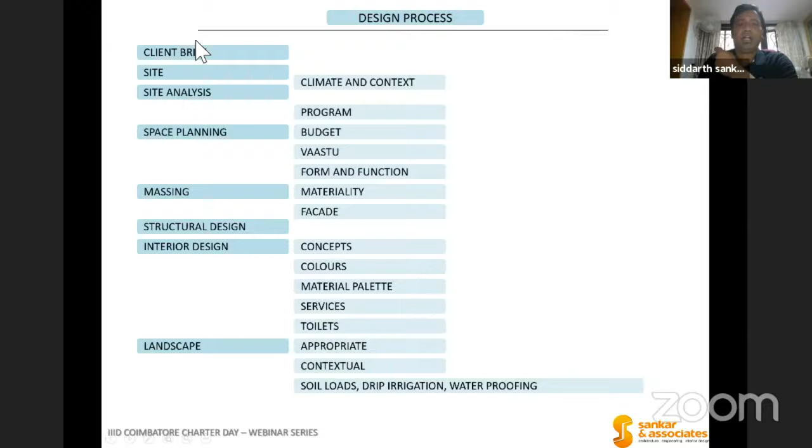Let me divide this into a pragmatic division of how the process of house design goes. First, and probably the most paramount thing, is the client brief - besides the requirement, their aspirations, their family style, the family size, who's going to come and live with them. Are they a joint family? Are they a nuclear family? It varies from city to city, region to region, country to country, person to person. So this is something one has to pay strong heed to.

Site, climate, and context - probably the most important thing. For any building typology, I think I'm preaching to the choir here, but site analysis: understand your site perfectly, it will always give you clues. This is a mantra we've gone about for the last 50 years in our firm, and we've achieved moderate success doing that. Space planning.

Budget is something that drives space planning. Today, Vastu, whether you like it or not, whether you believe in it or not, the Vastu guy or Vastu becomes a very important part of the house. More often than not, I encourage the client to just get the ideas from the Vastu guy and come to us, and don't bring the Vastu guy to meet us. That's one thing out of your head.

Form and function, which is what the architect derives. Materiality, the architectural style, what you're thinking about, and what you want to bring to the plate as a building - because the architect's dreams are also a part of the house. So it's very important to get that out too.

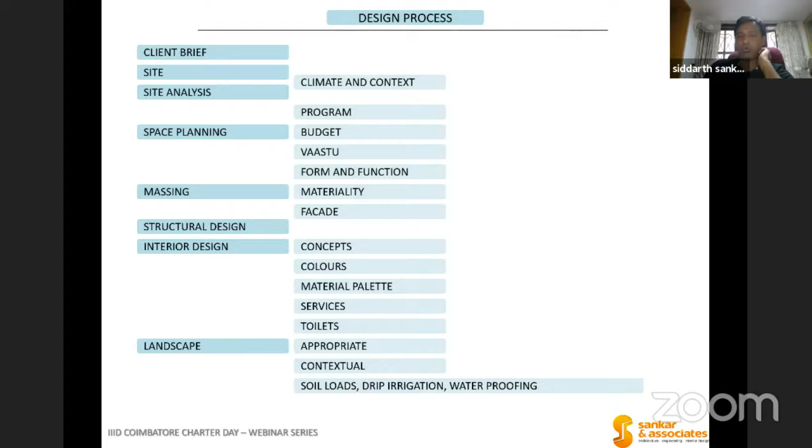So it is very important for you to understand appropriate landscaping. Things like soil loads, if you have roof gardens, pools and all that, you have to take into consideration. And drip irrigation, waterproofing, all those things are very important. These are basic building blocks.

Now what I'm going to do is talk you through three very different kinds of houses. One is a very tight urban house, the second is a retreat home, and the third is a house with a place of business or activity. Let me walk you through all three. How much time do I have? You have 10 minutes more. Okay, let me rush through them.

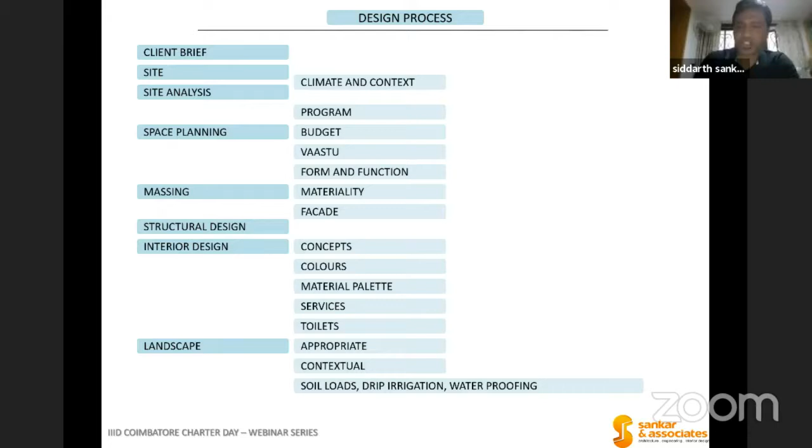And the client wanted about 5,000 square feet of space, so we had to do a block. The client had very strict Vastu guidelines and things like that which we had to follow. So we had to absolutely do the block.

There were two very important things. One was to satisfy all his requirements—he wanted 4 fully furnished en-suite bedrooms, besides other things. The second thing is, how do you make this block interesting, how do you make it look good? Most clients come to you and say, sir, I want the house to be cheap and best.

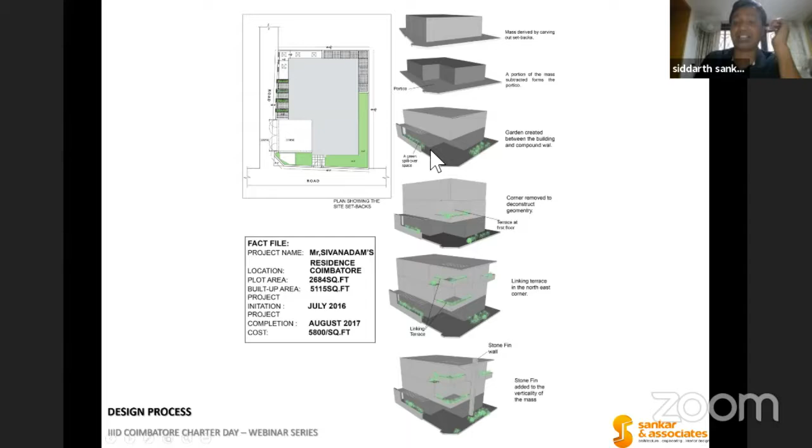Only in India does cheap and best work. Cheap cannot be best, best cannot be cheap. You need to work through all these things. So the first thing we started looking at was the site, and we said this northeast corner was the most interesting thing, let's start doing something with that. And that's where we started.

It's a simple plan. One enters through—luckily we have a corner road, so we have an entry, car drop off and everything. What we've done is create a lift. It's a 3-storied house. We've done all the public spaces on the ground floor—drawing, family, dining, kitchen—and taken all the bedrooms from the first floor onwards.

One of the things, a recurring concept in most of our projects, is that there are 2 ways you can always design a house. Landscape or a little bit of garden or nature in the house is extremely important to us, because they bring in most light and natural vegetation. That's very important to us. So you can design a house 2 ways: one is a house with a garden, a big garden in the front; or you can do a house in a garden, where you deconstruct and bring small garden spaces throughout the house, bringing garden to where the occupants are. To me, that seems a much better urban model.

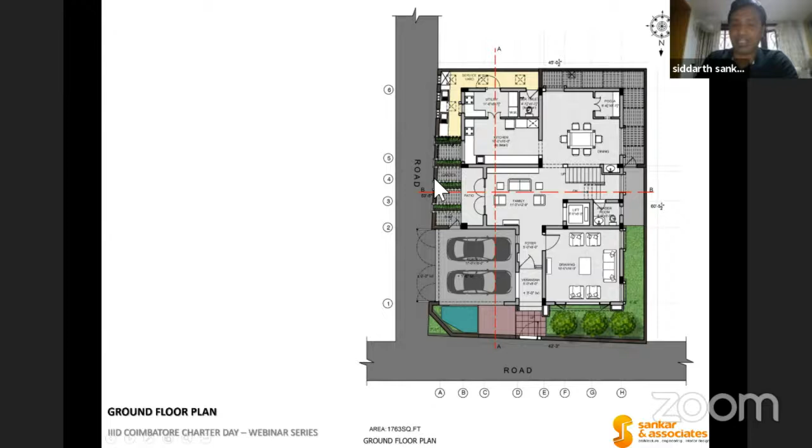So we started carving out these little garden spaces on every level. On the ground floor there's a garden level, on the first floor there's a garden, and on the first floor there's actually a lounge and 2 bedrooms. On the second floor there's again a garden. So every room overlooks something of value, and that's very important to us in every concept we do.

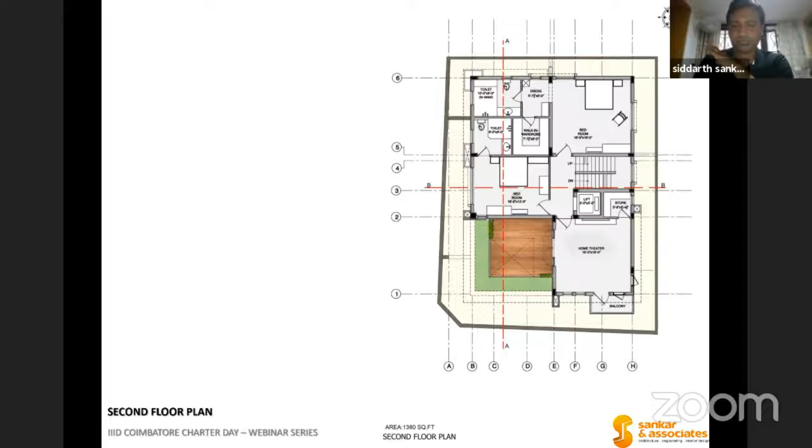So like I said, we started burrowing out the corners and making a very interesting corner of the house. We tied a pergola around it to satisfy the Vastu constraints and make it a rectangular, regular form.

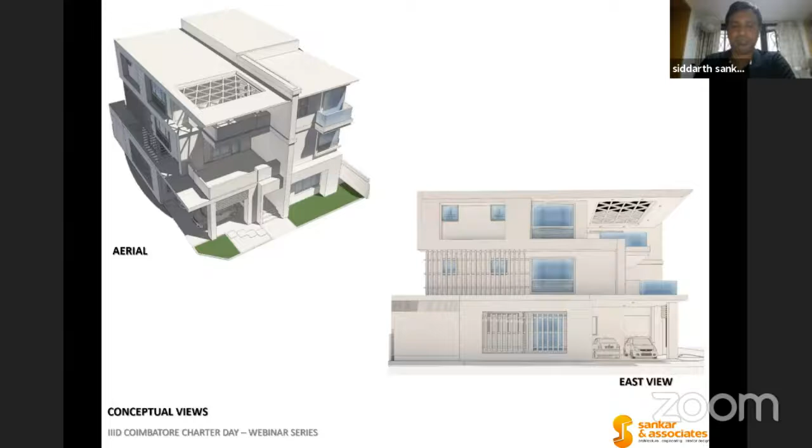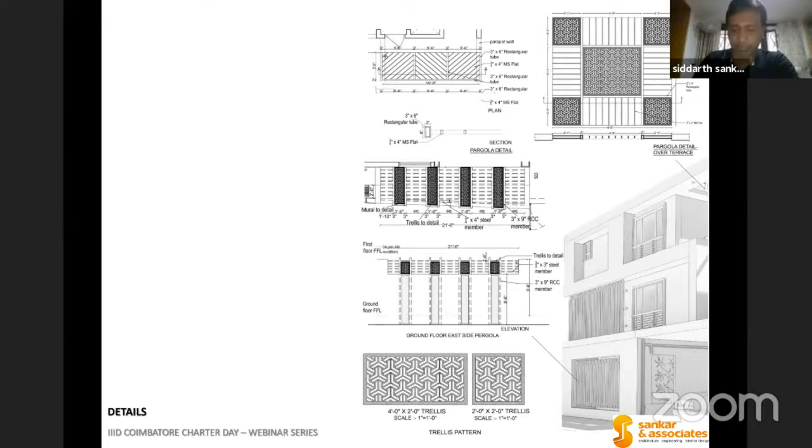Let me go to the photographs. So it's a 3-storied house, like I said. Another thing we did, and I'll show it better in the photograph, is that most urban houses have to deal with safety grills. We started eliminating these grills by introducing pergolas, which tied onto the compound walls and created gardens within them, thereby eliminating grills on all the windows. I'll show you more pictures—you'll get more clarity. That was the first 3D model we generated.

The materiality completely changed as we went along with the project. That's another thing with building, especially with housing typology—it's a project, a product that's always in flux, and you have to be ready to embrace the change.

Like I said, this is the 3-leveled house. This is the side garden. We've got 2-leveled gardens, one above the other, and one overlooks the other. And we've got a lot of overlook spaces in the house.

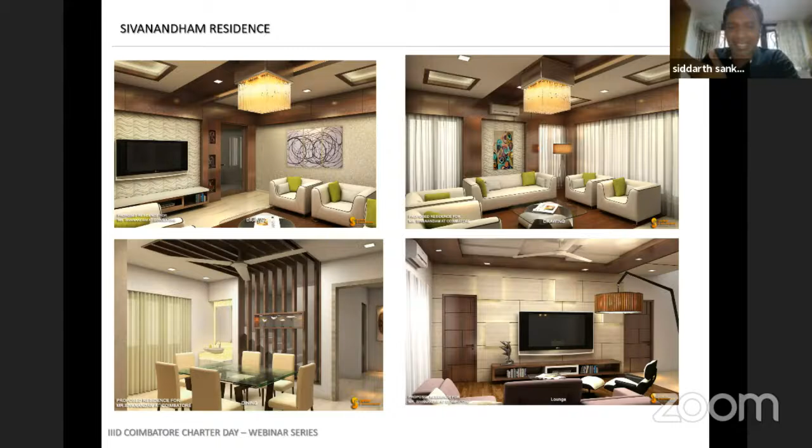We did interior renderings. The client wanted wood and beige color, he wanted a very soft look to the whole thing, and that's kind of what we went with. And why not, it came out pretty well too. So that is what the house looks like.

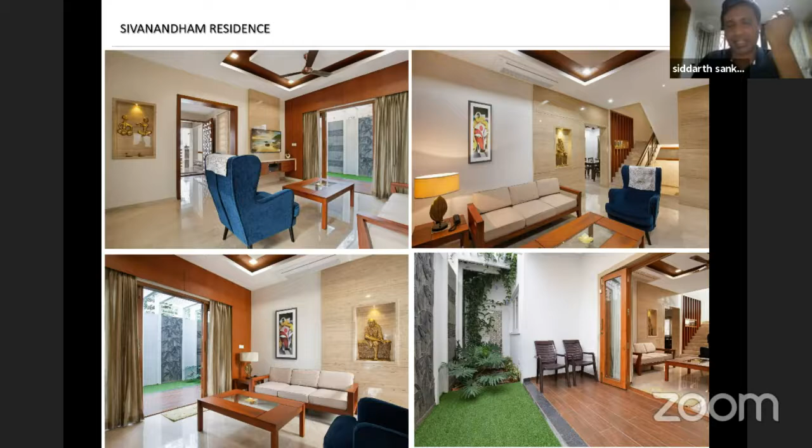This is the shot of the living room, and this is the side garden. You get out of the family room into the side garden, and you can see the pergolas on top that span the building to the compound wall. Thereby, we've eliminated all the grills in this area, so when you open it out it's a completely open space, and they even leave it open at night. Because of the pergolas there's a tunnel effect that gets invoked, and the whole house is filled with natural ventilation.

This is the detail I'm talking about - these are the pergolas on top. This is the boundary wall, where we've done some nice stone work. And this is a space where the family hangs out all the time.

Let me go to the next thing, which is a retreat home. Here we had a large site, but it was a challenging site because it was heavily sloped. It also helped that it was a house for a friend, so we could experiment on a few things in the house.

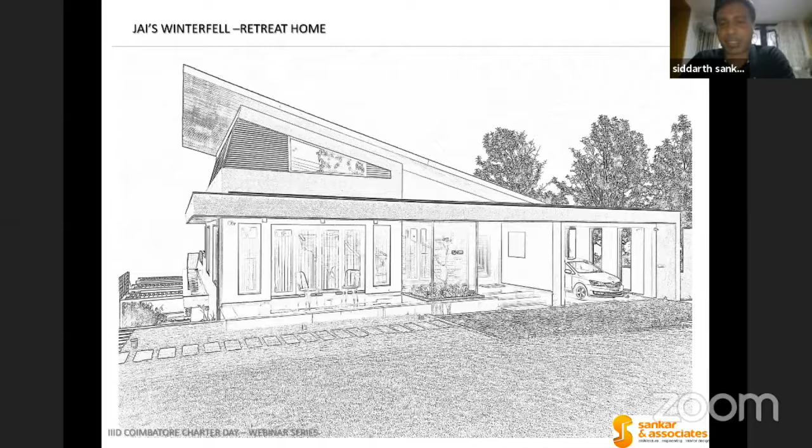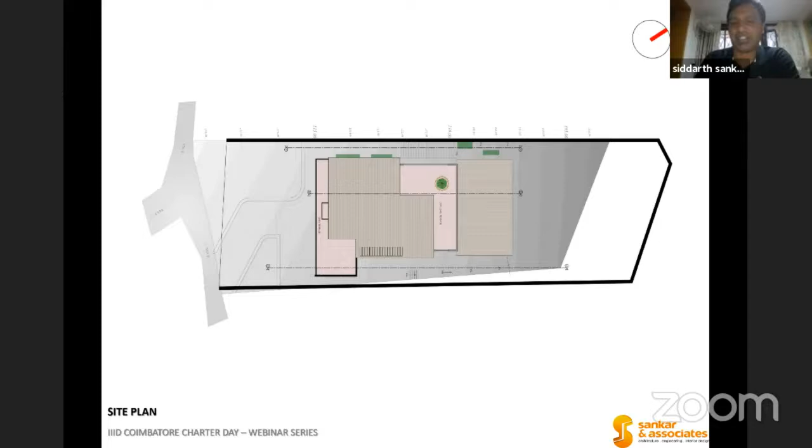So what we did was we started working on the house in 3 levels. The first level was, you came down from the road into the house level. We pushed the house back by about 25 to 30 feet.

And we created a car park, and we brought in all the public and common areas, and every level had a deck. I'll show you a view of the valley. It's drop dead gorgeous. The living, dining, the kitchen, and all that is in level 1, and there is this pink space which is the deck, and you can see the other levels below.

Level 2 has the bedrooms. Unfortunately, because of Vastu, the master bedroom is in the southwest corner, and that's the only bedroom that doesn't have a deck. So sometimes Vastu comes and kicks you in the back, and you can't do anything about it. But the other bedrooms have gorgeous views looking outside, and there is also a private deck in between.

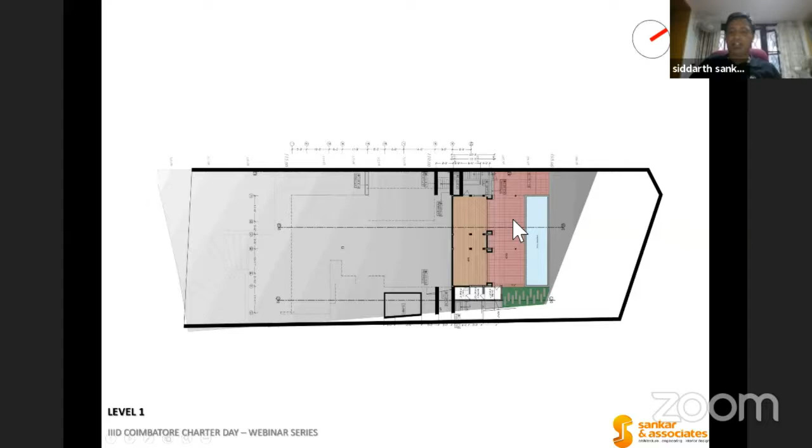And the third level is sort of the entertainment level. We wanted the third level to be the entertainment level because they wanted access from outside. So we've done a bar and a heated pool in the cool climate of Coonoor. We've done a heated pool, and I'll show you pictures of it.

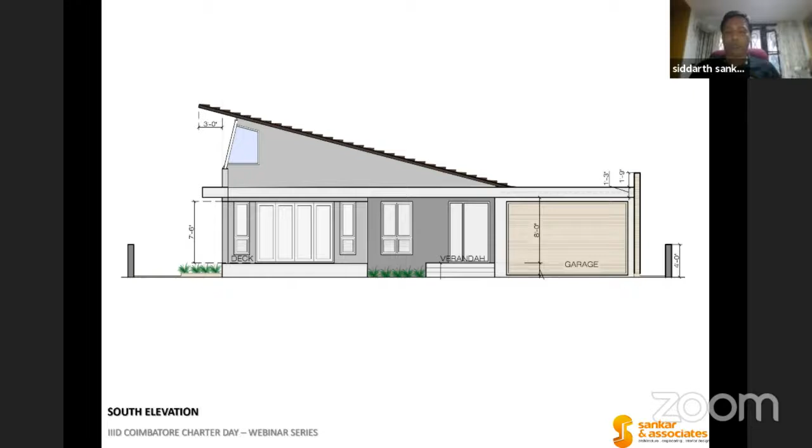It's a very, very unpretentious looking house in the front. This is all you see from the front, but the house unravels itself as you go down the slope. You can see the level difference of the house. This is about 14 meters all the way down, so 40 feet down.

You can see the house, it's almost 3 to 4 levels. There's 3 levels of the house, and there's an upper level of garden and a lower level of garden.

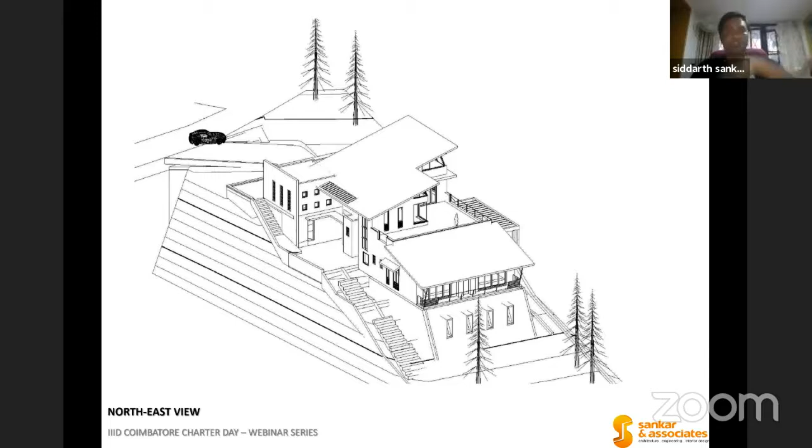That is the initial Revit modeling of the house. We use quite a bit of Revit modeling to help us work through difficult forms and difficult contours. You can see the steepness of the slope in this.

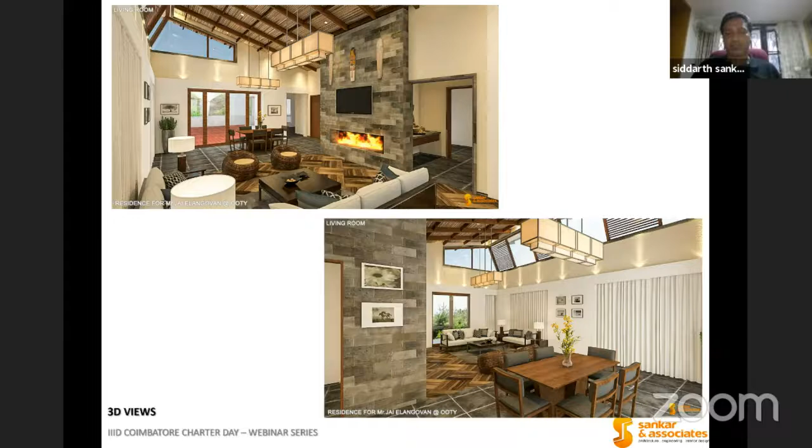Another thing that we wanted to see was the sky here is absolutely pristine, because there is absolutely no lights around for quite a bit, at least for about a kilometer there are no lights. So at night you can actually sit in your living room and see the sky, or in the daytime you can see it's clear, it's full of stars, and you can see the moon on a full moon day is absolutely gorgeous.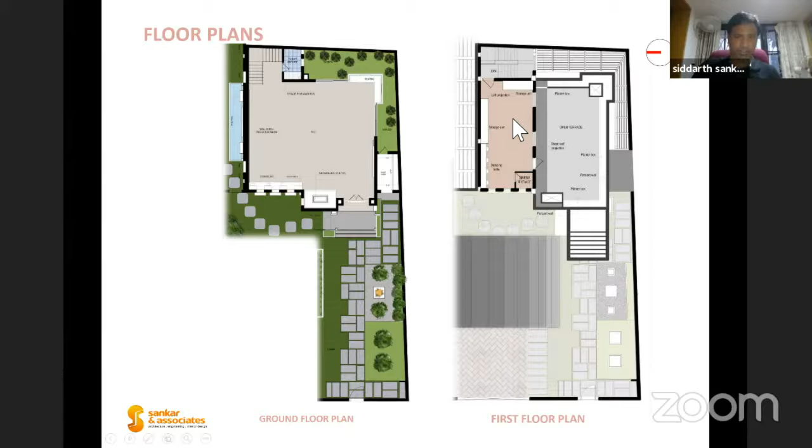One of the things we did here was bring in Nataraja, the guy who watches over the whole dance, and he had to be kept in a particular way. Another thing we did was open it out into a garden, so during daytime breaks people can sit out for a bit, and it also fills the studio with natural ventilation. On the first floor of the dance floor, we've done a small dress change room, and production is done there.

One thing we've done with the Nataraja statue is given it a skylight, and at exactly 12 o'clock on the summer solstice, it's filled with a ray of light, inspired by Tadao Ando, but we wanted the shaft of light falling on Nataraja.

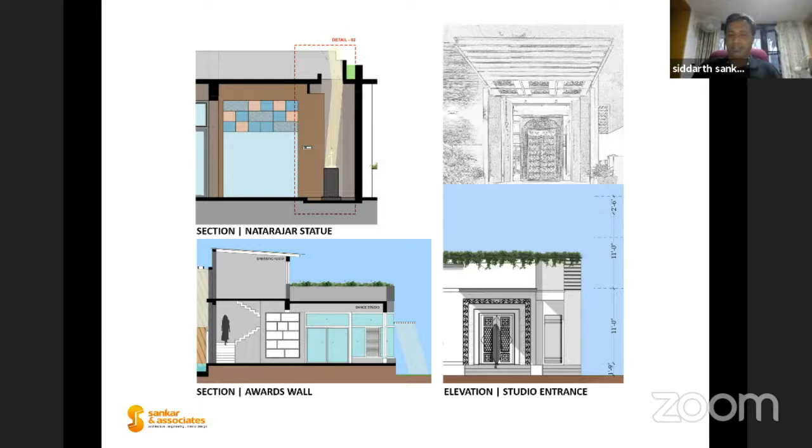One of the things we wanted to do was blend traditional elements with very modern construction. So that's how we enter - there's a Deepa Stambham which welcomes everybody in. This is about a 150-year-old door that we got, and we had it painted by a mural artist. We also had a very stiff budget to work with, so all these tiles are actually sample tiles from a tile showroom, which we used for the ceiling.

That's the shot of the Deepa Stambham. And that's the sample tiles we used on the ceiling - it brought a little element of color to the whole thing.

This is the interior space. This is the Nataraja where the shaft of light comes from the top, and we got this mural painted by a group called Bhavanam - the largest mural he's painted, about 12 feet by 40 feet, completely hand painted in the studio.

We've got a small research corner where she puts all her books and does all her laptop work, and this is also the audio segment - all the audio instruments, recording instruments are there. It can be pulled out at any time and they can work.

Another thing is the flooring is specialized, because there are two things: one, we didn't want the knees of the dancers to be affected. Second and more important, dancers, especially in formation, communicate by tapping their feet, so we didn't want a very silent floor - they would tap, and the dancers behind would listen and follow course. That's how patterns in dance work - it was a very important learning for us.

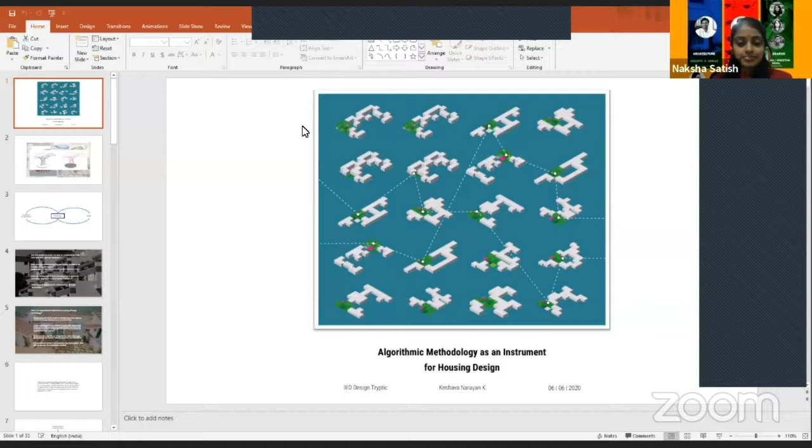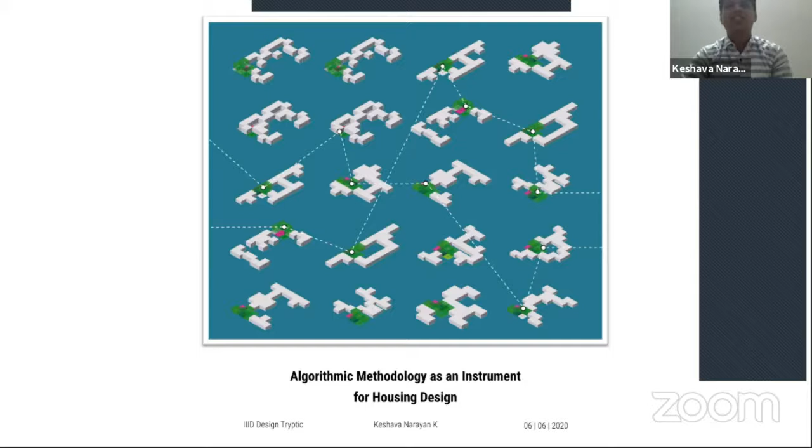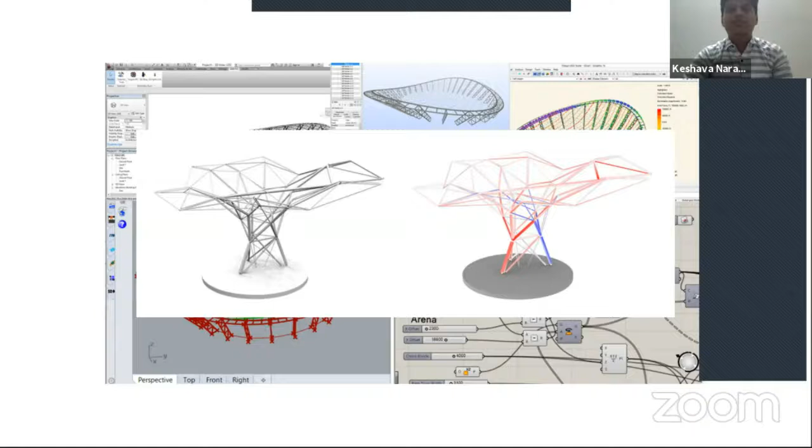Tonight I'm looking at a house through the lens of technology. If we talk about technology generally in architecture, it relates to producing funky forms. The computer as a design tool usually comes later in the design process, once the design is done. I was obsessed with this idea that technology should play an active role in the design process and not just as form optimizers. So I was obsessed with this question: how can technology inform the traditional design methods, and in turn inform the design of a house?

So I asked a few questions at the start of my research. Can the design decisions we take as architects be more informed than just our instincts? How can we push technology's limits beyond visualizing our intuitive design strategies? How can the traditional be reinterpreted through technology?

So why is it important to understand housing through technology? As Siddharth sir said, house is the most complex thing an architect can design. It's also the most predominant form of construction in India that is almost neglected. Usually in large scale housing projects, the scope and scale is very large and requires numerous design decisions that go together with each other.

These considerations can be processed as information in a computational process. Computers are well equipped to process a large amount of information better than humans. It's also possible to unearth new patterns and relationships that cannot be seen in a traditional process, because the medium of analysis is just different.

As we see in architecture generally, all good designs have a recurring set of patterns in them. My intent through this research was to unearth these successful housing patterns in habitats in India through technology.

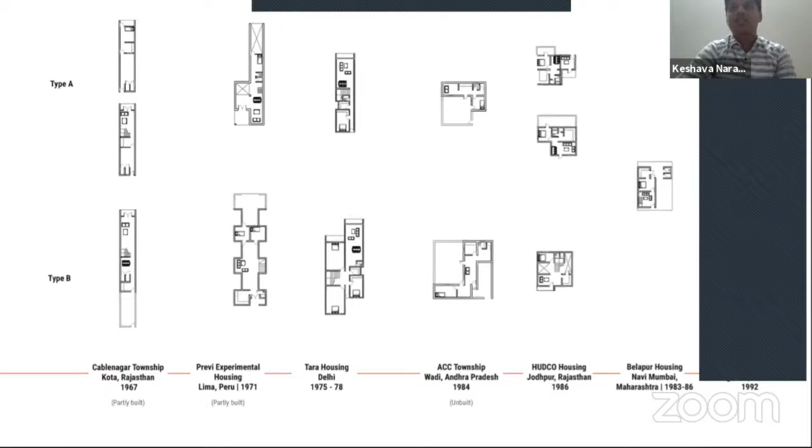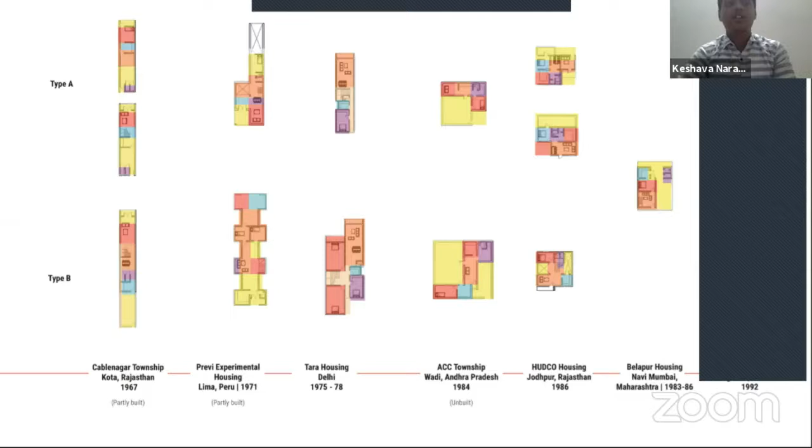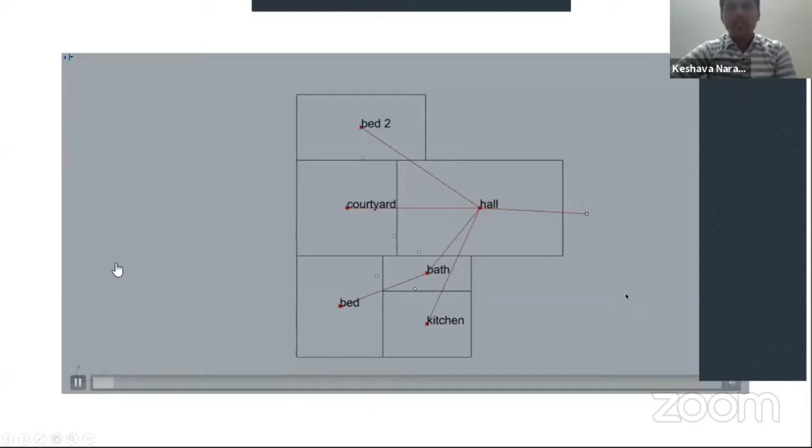First, I abstracted the functional spaces from the spaces in terms of functions in the units, and then fed them into the generative system. Here I'm running a short video of how the generative system analysis works—the spaces are abstracted in terms of squares and dot lines.

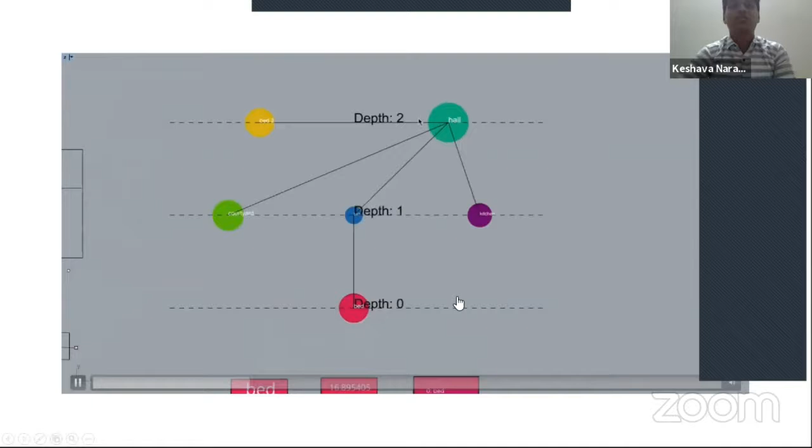Once I feed this into the generative system, it gives the percentage of area, and it also gives the depth map. The depth map refers to the number of doors one has to pass through in order to reach the space. This is how the generative system, done by me, analyzes the house plan.

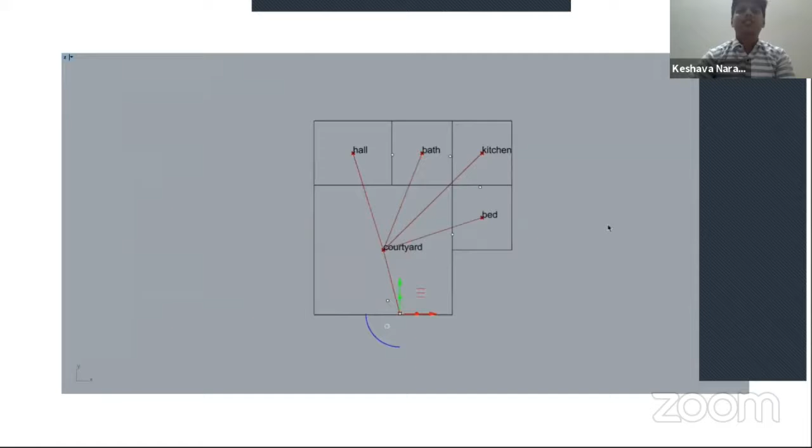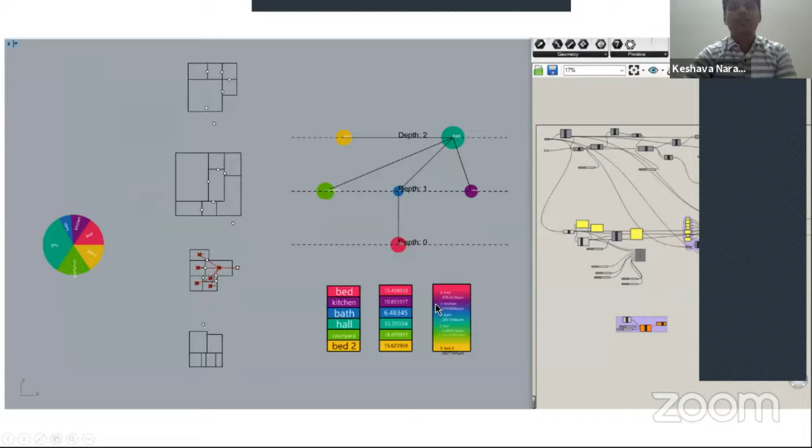This is a screenshot of the result generated from the code you can see on the right. It displays the percentage of area that each space occupies, the depth map, and the percentage. As a result of this, there are 6 criteria that I analyzed using the code. The first one is unit types.

Here I analyze the location of different spaces and the shape and proportion of each space with respect to each other. The second is the module, where I looked at the module as a whole with respect to the unit, then calculated the ratio of open to closed space in a unit, the interrelationship of functions with respect to the unit, and the overall generation pattern of how the units function with each other.

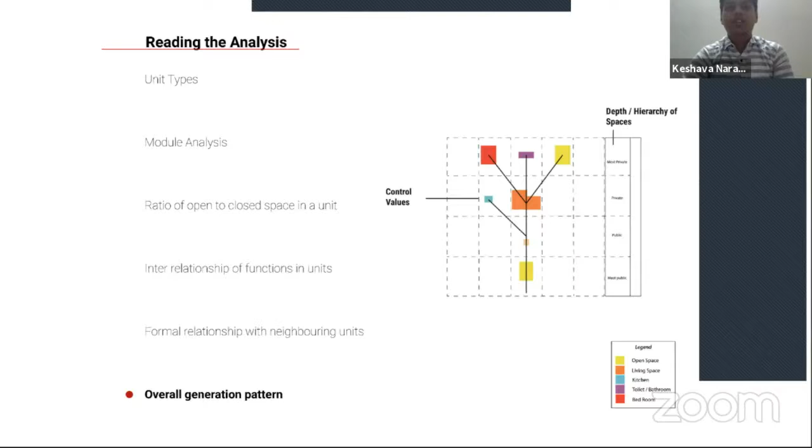This is the chart that I came up with after analyzing these units. The general observations that I had after doing these case studies—I have classified them into three types.

One is profile or geometry oriented. I observed that in Correa's housing projects, the unit size was generally 1:1 or 3:1, referring to the proportion of area occupied. The square is usually inspired from the Vastupurusha mandala, which is used in hot and humid climates like Mumbai, whereas he developed a module called the tube house, used in hot and dry climates. If the unit is a square, it follows a cluster generation.

If the unit is linear, it follows a chain-like generation. In Correa's works, you can see the importance of the courtyard that is generally there in his projects, very evidently seen. The ratio of mass to void in his projects is generally 1:1 or 1.5:1.

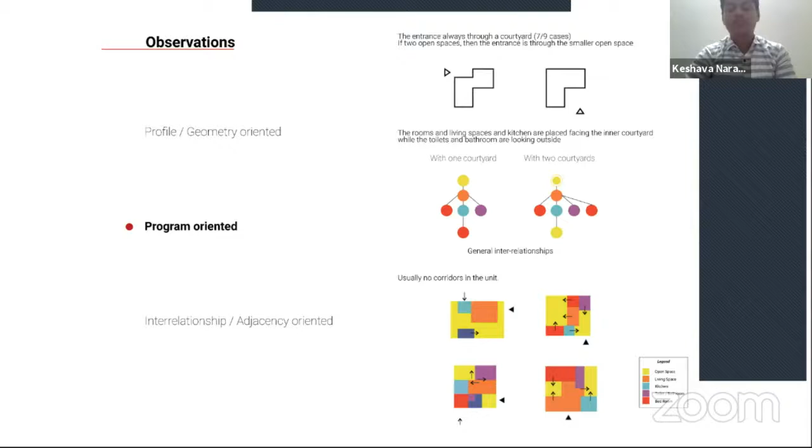For program-oriented units, the conclusion is that entrance is always through a courtyard or open space. If there are two open spaces, entrance is usually through the smaller one. Generally there is no corridor or circulation space in his units, because it increases the construction cost. The typical space allocation of each unit is as shown here.

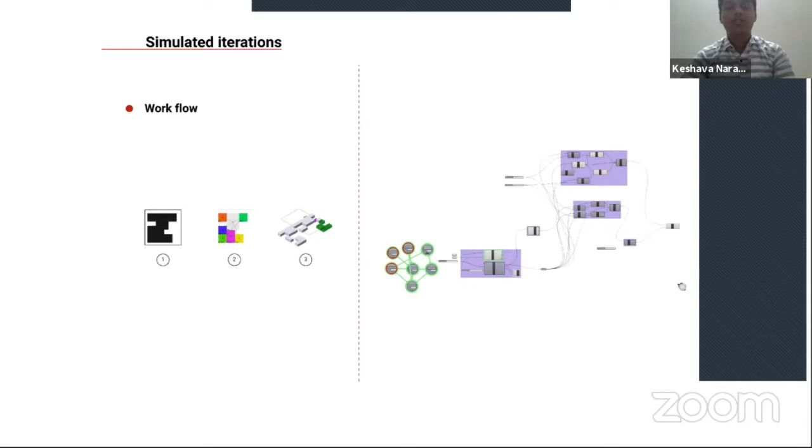After doing this analysis, I created a workflow of how this generative system should work. First, the generative system allocates the space for the unit to occupy, and then it multiplies.

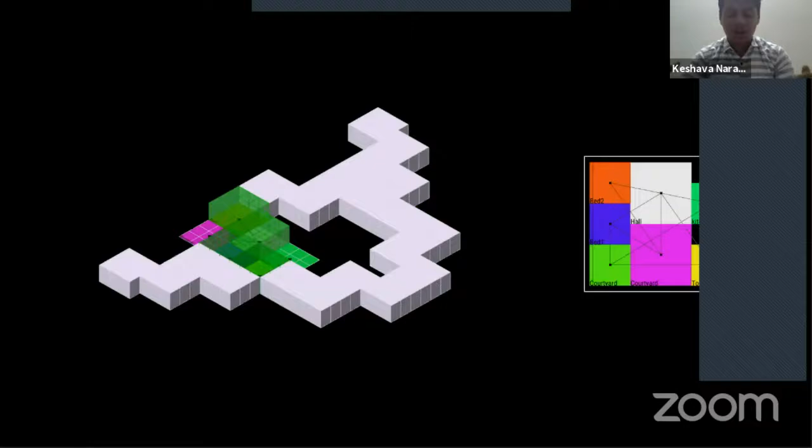This is some of the iterations that was generated as a result of the Grasshopper code. I'm playing them. These were the kind of outputs that I got as a result of this analysis.

These were the kind of unit plans that were generated as a result of this analysis by Grasshopper, and these are some of the iterations.

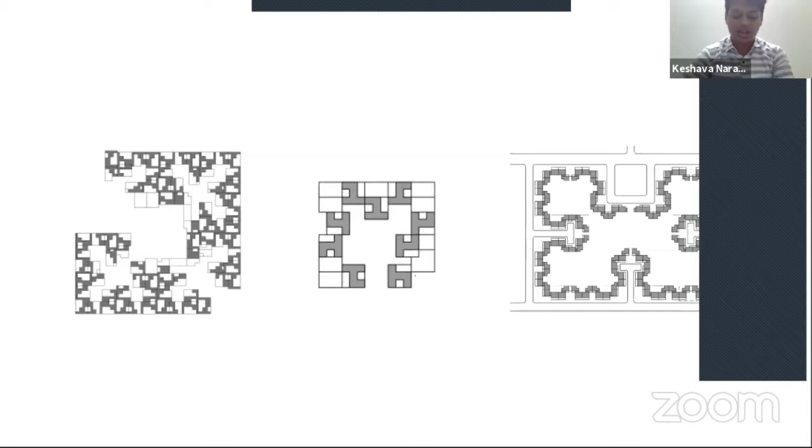This is one of the results that I had obtained, and here you can see that it has considered the open space and has designed the unit accordingly. The scale of the open space generated in between is similar in scale to the image shown on the right.

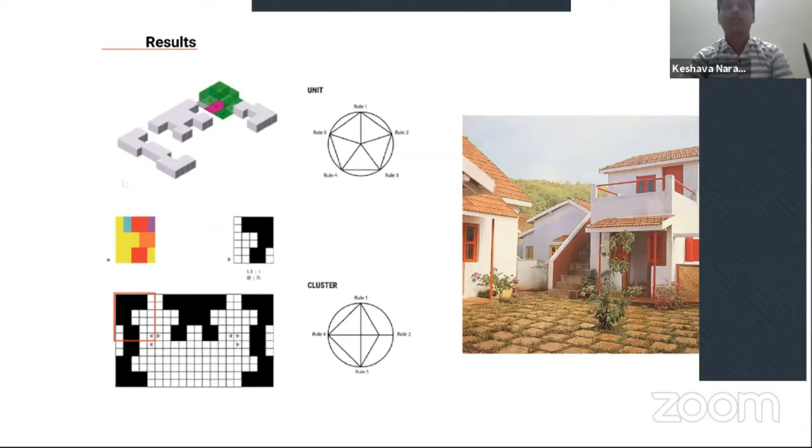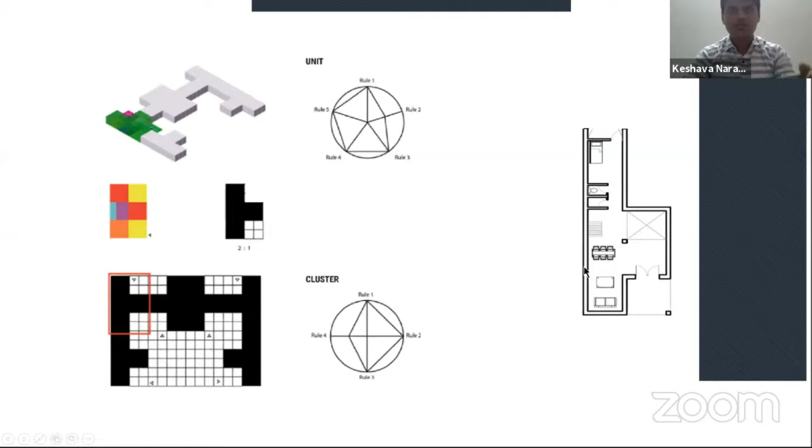This was a strange coincidence that happened: the Grasshopper system generated a unit exactly similar to one designed by Correa in one of his housing projects. This was one of the observations, and like this, I had collected many observations as a result of this analysis.

Here I have compiled the units that have been largely similar to what Correa has designed. For example, this one shown in a rectangle is similar to the Previ housing, and this one is similar to ACC housing, one of the projects shown earlier.

The conclusion is that the design process does not just end with choosing one of the generated designs. The trade-offs generated earlier have to be analyzed, and design decisions considered alongside them. Understanding traditional designs alongside technology can be a way for technology to start tapping into the intangible aspects of the design process, which is often what technology is criticized for missing.

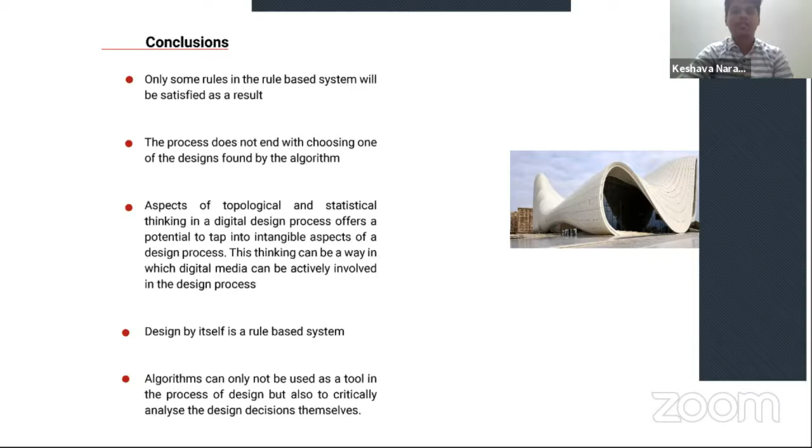Hence, algorithms cannot be used only as a process of design, but should also be used to critically analyze the design decisions themselves, not just stand as form optimizers as they do in the world today.

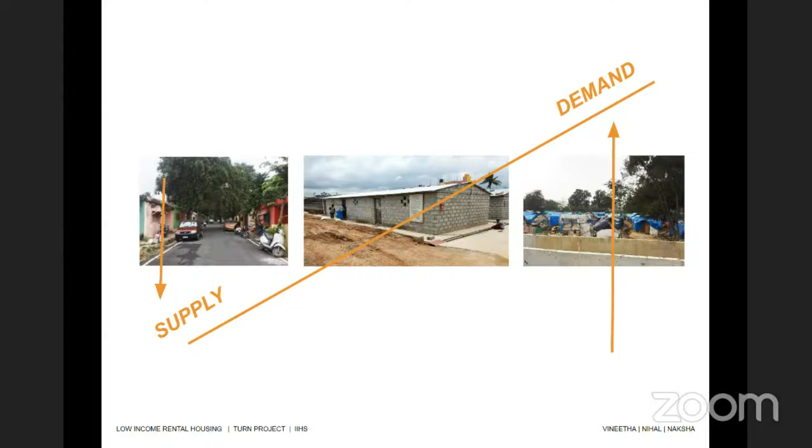So we have this skewed demand and supply ratio, and not only are we not building houses for this section that needs it the most, we are also not building them fast enough, essentially.

So now we know that we need multiple tenure housing because not everybody can afford to own a house, and because people are more mobile, you need different sorts of housing options. We need to rethink the way that we provide houses to people.

So our question was then to understand what forms already exist and how can we facilitate and strengthen them. We say strengthen and not provide rental housing, because our research shows that due to the complexity and largely informal nature of rental housing, it is almost impossible for the state to provide adequate rental housing. It can, however, facilitate through policy and subsidies.

But for that, there is a need to research and understand who are the people who are actually producing these kinds of rental housing, what is driving the form of rental housing, is it adequate, are the living conditions good enough, and how do we strengthen these informal, homegrown practices of providing houses and scale it up in a way that it actually bridges the affordable housing gap.

So I'll now pass on to my colleagues who are going to talk about this. Yeah, so essentially we've...

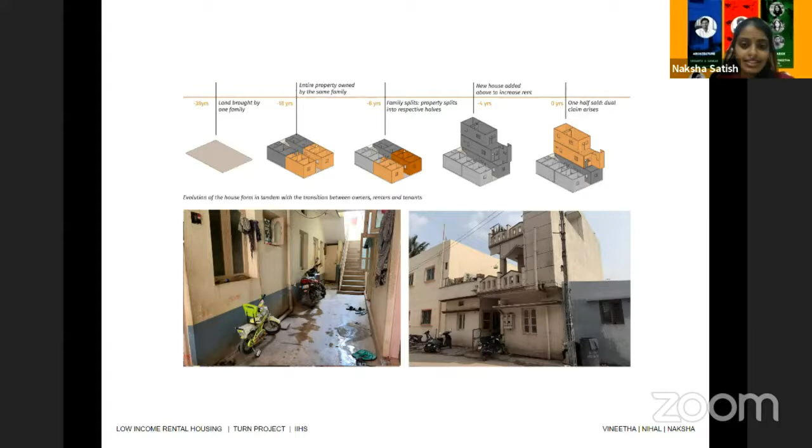The second feature of rental housing is the idea that it is highly born out of economic and social considerations of the homeowners producing and creating this supply. This story is from a house in Yashwantpur, which is a growing post-industrial zone very close to the transportation hub.

Mrs. Sarojamma owned this house initially. As she went through financial transformation, her considerations led to the bricolage nature of this house. You can see how impromptu it is, with staircases randomly added. We were trying to understand what was the reason behind this and the sequence in which it was born. Through chit funds, she managed to build one floor with her neighbors.

Then she took a bank loan and added another floor, becoming an owner of 8 houses. But very soon, due to mismanagement of finances, she became poor and couldn't pay back the loan. So a temporary owner emerged, and she sub-rented the property to someone else. Those 4 properties were then further sub-rented by the new emerging owner.

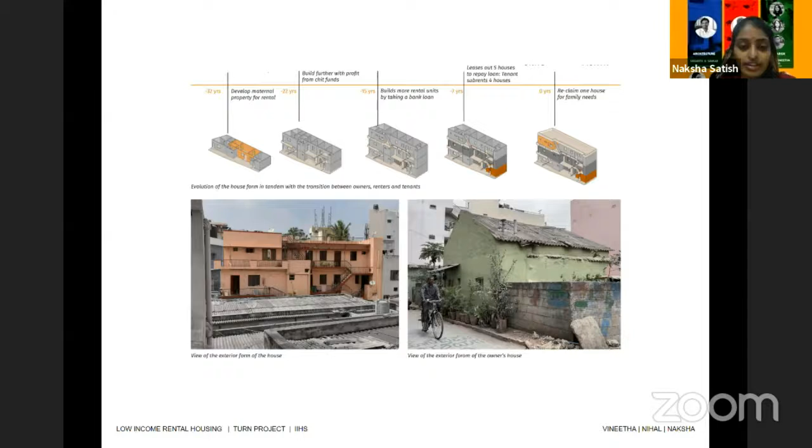I'll quickly run through the next major finding from both cities. One other feature we came across was that in both cities, as Naksha had said before, there was an absence of a formal designer. In most cases, the rental units emerged on the basis of situational constraints and the local knowledge and trends of the neighborhood.

If you look at this particular case, the homeowner was a migrant to Coimbatore who had migrated in the early 90s, and he was working in one of the manufacturing units that made jigs and fixtures. Over the decades, he saved enough to procure this particular piece of land, and then he himself designed this building.

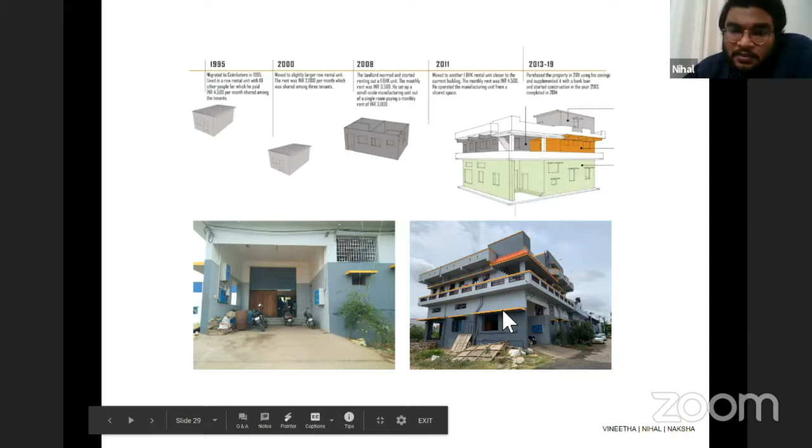So if you look closely, the ground floor of the building is a manufacturing unit that houses a small scale industry that makes small parts for larger industries. The first floor houses his house where his family stays. Then there are 2 rental units on the side here, and the top floor again has a worker quarter.

So these rental units came up as an impromptu decision. Like what Mr. Siddharth was saying earlier, a house is largely driven by the logic of an individual. In the same case here, the reason why this person chose to build rental units was that this particular area was located on the outskirts of the city, and the neighborhood had largely similar small-scale manufacturing industries.

When he chose to bring his family over and make a house here, he realized that they don't have any sort of feeling of presence of neighbors around. So once the building was nearing completion, he added these 2 rental units so that they would have a sense of security offered by the tenants.

Similarly, the decision to add a workers' quarters was taken because that also in a way ensured a surety of labor to work in his manufacturing units. Since it was designed by himself, when we were interviewing him, he was saying he's aware that he had made a couple of design flaws, and in retrospect, if he had known these things before, he could have substantially saved a lot of costs.

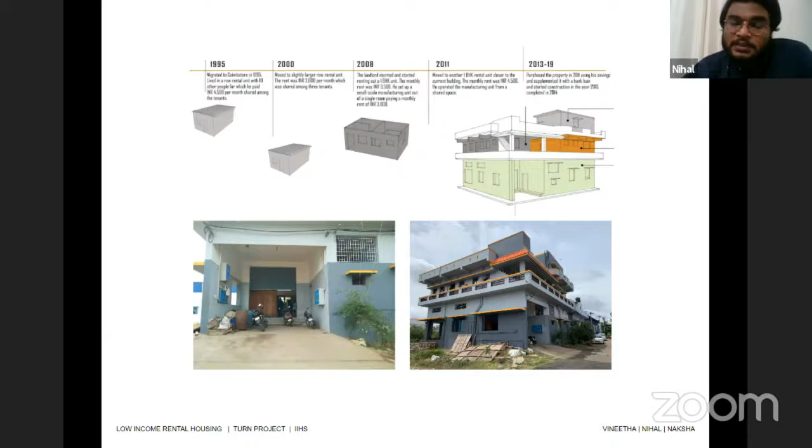A similar case that we saw in the outskirts of Coimbatore, Naksha, next slide, is located near the Chill SEZ in Coimbatore. Here again, this particular piece of these units stand on a large tract of agricultural land, which is located in close proximity to the SEZ.

The landlord was a former employee at the IT park, and realizing an immense business opportunity, he saw that there was an increasing demand for rental housing in and around that area, particularly by the support staff employed in the offices in the SEZ. So he invested in building these row units in a small portion of his agricultural land.

When we were interacting with this particular person, he was saying that when they built the first set of units, they didn't really have an intention to expand it. That's why they went for this particular sort of construction, also because this was the kind of construction you see all around Coimbatore and other parts of the city that usually caters to this particular tenant group. This is also the reason why they could not build on top of the first set of units, because it didn't have a proper concrete roof, and the foundation was not strong enough to accommodate a second floor. So these are the kind of decisions that the landlords make at a particular time.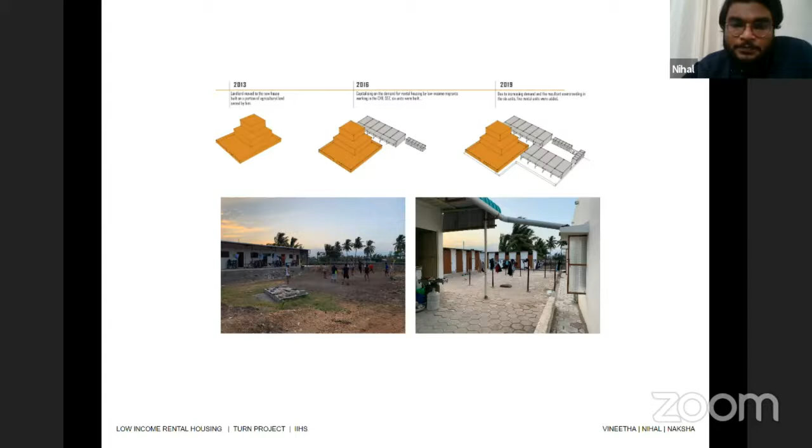One other major finding of our study is the owner-tenant relationship. What we see is that the form is an imprint of the social relationship between the tenant and the owner. It's often a codified manifestation of certain codes of conduct that they share between themselves. Across both cities, we observed a clear trend: the kind of relation the tenant had with the owner, and vice versa, often informed the design aspect of the house.

For instance, in this particular case, this was a unit built as a post-retirement plan for an elderly couple, located in close proximity to the CHIL SEZ. They built this in anticipation of the IT boom, and they thought their prospective tenants would be the IT professionals working in those companies.

But unfortunately for them, it failed to attract their targeted group, largely owing to lack of connectivity of that area and lack of amenities in and around it. Instead, the group it attracted were the support staff in these companies, largely security guards and housekeeping staff.

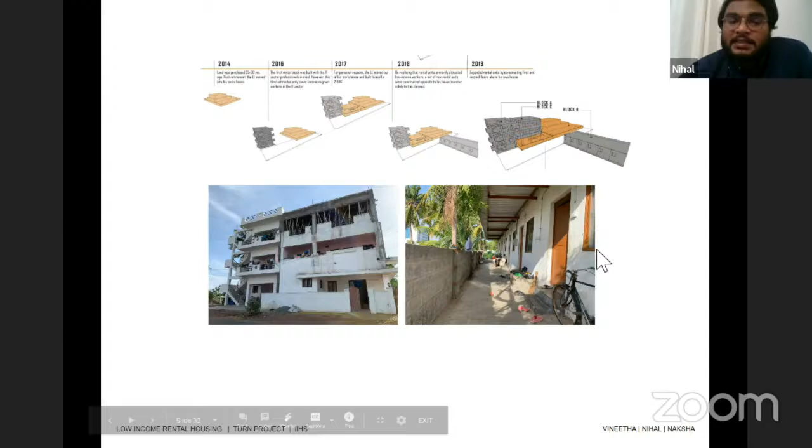Again, the houses went from a 2 BHK to what you typically see for worker housing, which is a large hall that may or may not have a partition in between—the kind of worker housing you see in Coimbatore in earlier cases and also in other cities of India.

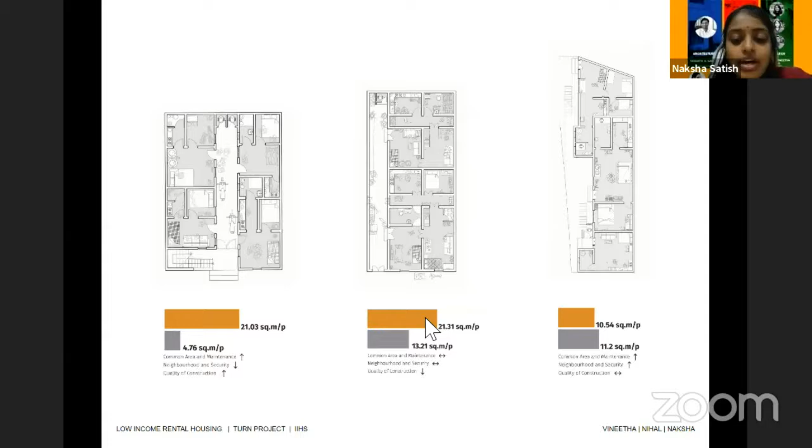When we examine the individual houses and the space occupied by the owner and tenant, we see a certain sort of negotiation happening. In a few cases, the owner occupies a substantially larger area than the tenant, but in other cases the tenant also dominates because of a relationship that grows over time.

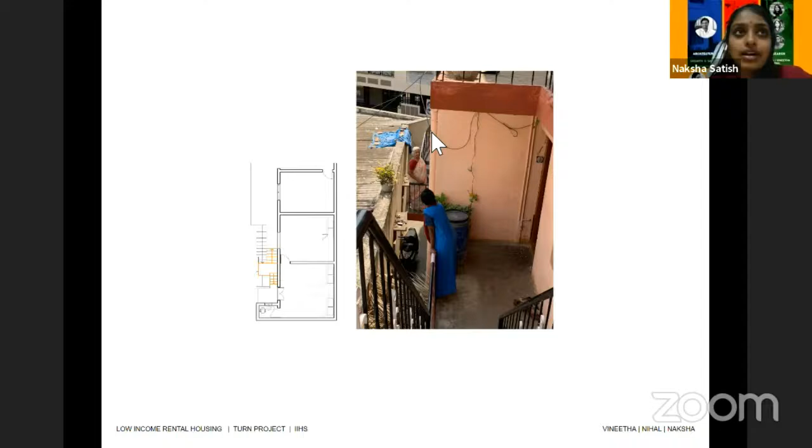We wanted to pull out certain instances of how the architecture of these houses facilitated or shaped new relationships between the tenants. Because this house was occupied mostly by bachelors, they were forced to add a parallel staircase, which led to a very different relationship and way of interaction between the neighbors.

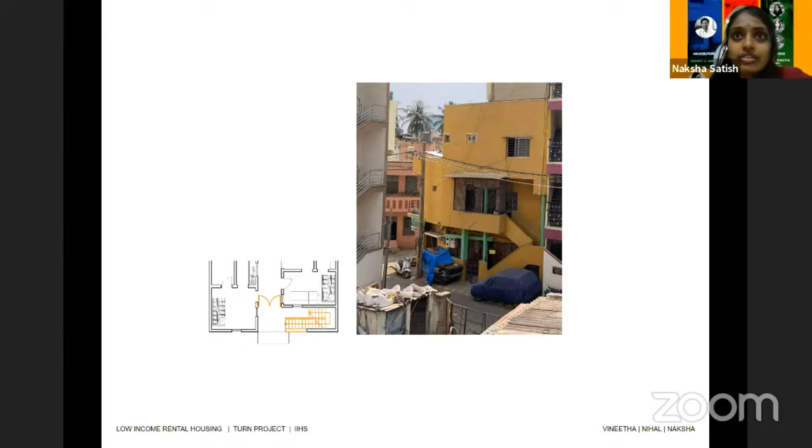When this house owner finally decided to add a house above, they constructed an external staircase and created a new door to prevent the new tenants from interfering, which hints at a certain sense of privacy and boundary that often gets lost when trying to produce large-scale affordable housing.

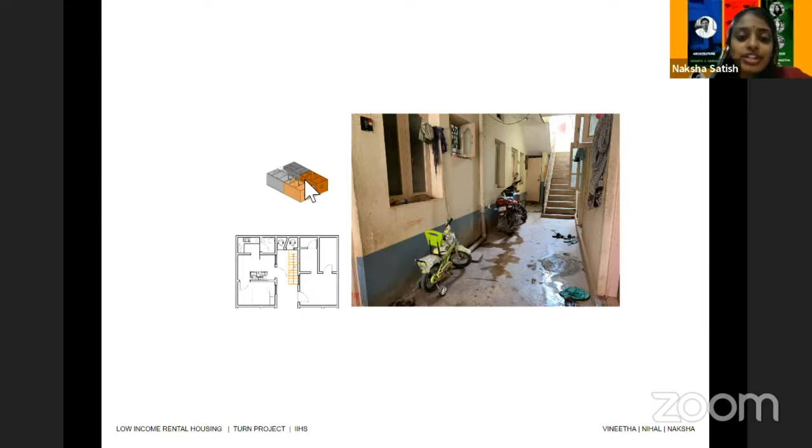On the other hand, in the first example we were talking about, despite the split in ownership of the place, because the house was built earlier, the one staircase continues to exist and negotiates with the emerging new users and people.

We wanted to share another set of findings, the stories of the form. The form itself is an imprint of the social relationships between tenants and owners—the arrangement of furniture inside codifies the aspirations of the tenants, and the rental housing outside actually affects the configuration of the house itself.

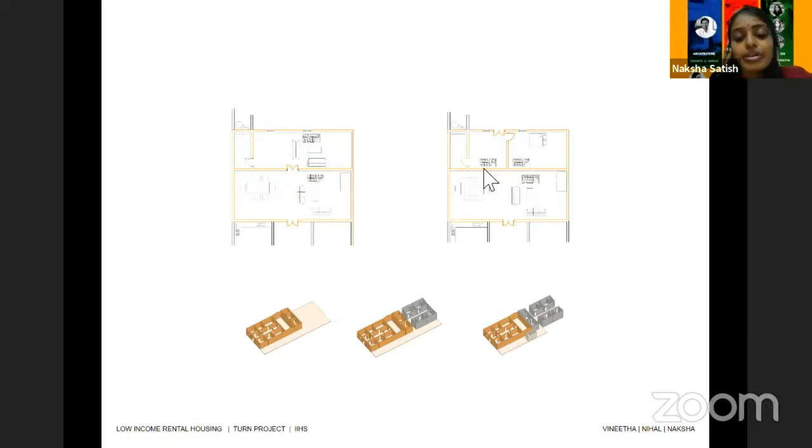In the first case, the room at the back was originally part of the house. But when they decided to add rooms at the back, they sealed that door and created new rental housing on this side with a new door. So things happening outside also start informing the configuration of the house itself.

Outside factors like land also play an important role in defining the typology that emerges. In Coimbatore, as Nihal mentioned, there is an abundance of land, so new rental forms could spread across the area. Whereas in Bangalore, being a pre-established industrial area, the plots were already laid out, and the availability of land restricted what form you could build.

So in this particular case, they built only on half of the land and kept the other half as is, so that they could sell and make some profit along with it. This piece of the building, which was built only on part of the land, had certain limitations because it couldn't scale up further.

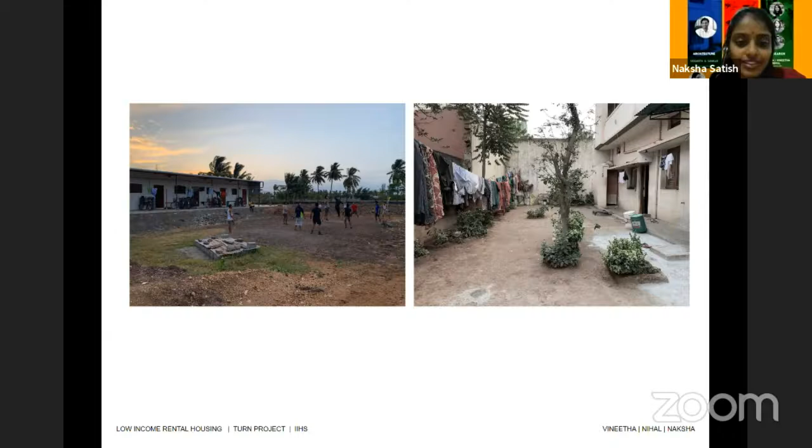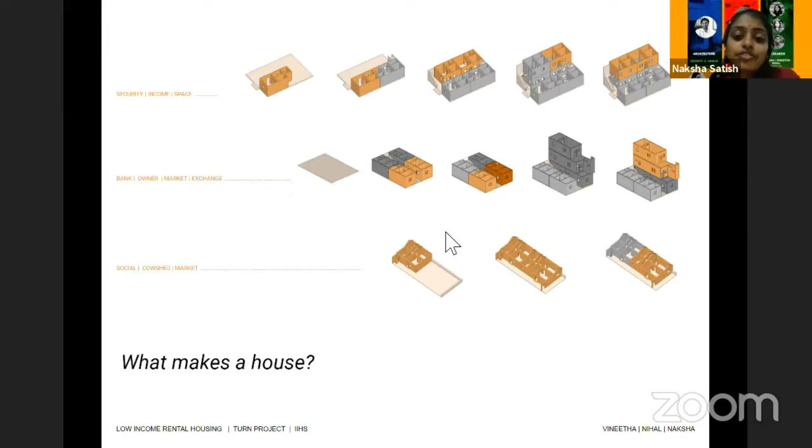So we see that despite the modularity and the design of the underlying layout, because rental housing was produced by individual owners, there are several expressions despite a strong framework. Through the stories we see that a house was not made at once. It was not the vision of a single person, and it grew incrementally over time based on the economic and social considerations of very different people, not just the owner, several times the tenants themselves.

So that takes us back to the initial points that we made. Through our findings, through our research, what we realized was that a host of economic and social factors, which more often than not lies outside the purview of formal design, determines the production of housing. And to go back to what Vineetha had said in the beginning of the presentation, as India is rapidly urbanizing, the provision of rental housing becomes a crucial component to address the affordable housing shortage that we are faced with.

So in this regard, what our research intends to do is understand the production of rental housing so that we can inform the potential policy directions that the state, especially in the context where they are on the verge of formulating a rental housing policy, can move towards, so that they can facilitate this sort of organic residential rental housing market that is coming up in an attempt to address the affordable housing shortage.